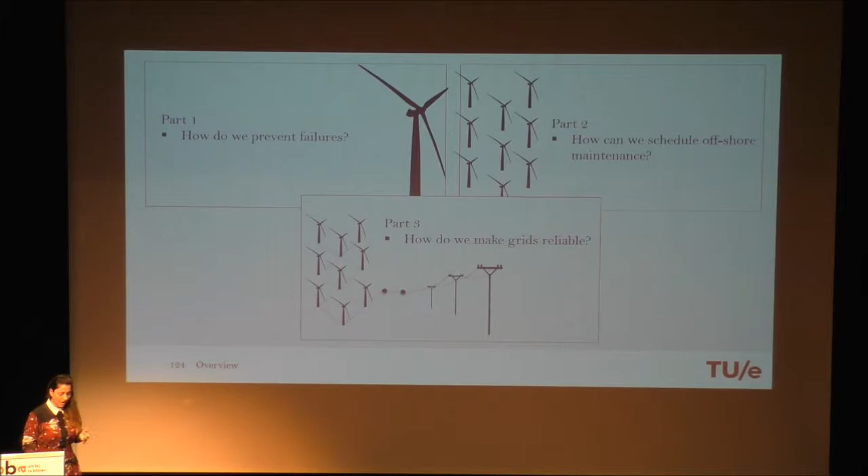In the first part, I'm going to address how we prevent failures when we're just looking in isolation at one single wind turbine. Then I'm going to extend this question in part 2 into how we can schedule offshore maintenance. So we have an entire wind park, and in that wind park we want to prevent failures from occurring. And you will see that the nature maintains some characteristics, but it also has some endogenous differences. And then in part 3 I'm going to move towards grids, and how we can make grids much more reliable. So starting with the first part on how we prevent failures, I'm going to start with the data, because everything in this setting starts with the data.

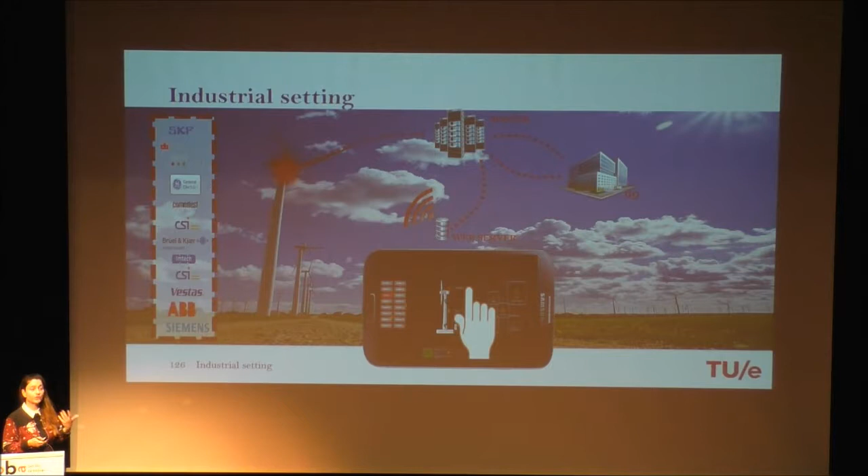So every single wind turbine is purchased with several sensors already, and many service providers can actually give real-time access to the status of a wind turbine. And typically that comes with 3 color characterizations. Green, everything is perfect, clear skies. Orange, I see some warning behaviors. And then there is red, things are starting to fail. And what I'm interested in, and this is part of the research that I'm involved in, is actually determining which of the 3 stages we are in. And for that purpose, what we do is we look at the data.

One of the most important characteristics of the data that I'm going to demonstrate the algorithm around is based on vibration data. Vibration data work exactly in the same way as in seismology. The only thing that is measured is displacement over time. So what you see here in the 4 blocks is vibration readings for the gearbox, vibration readings for the generator at one end of the drive, at the other end of the drive, again the generator, and here you see vibrations on the shaft.

Typically when installing such a sensor that collects the data, it comes with an ISO standard. And the ISO standard says that upon calibration, if your vibration readings are between 0 and 1.06, and the 1.06 is exactly this orange line here of the warning, then things are good. If you're in the region 1.06 to 2.12, then things are getting out of control. And if you're in the region above the 2.12, things have gone completely out of control, and therefore you need to stop the wind turbine.

And the first question that I had when I looked at that data is, and how much was the wind at that stage? Because I could imagine that the stronger the wind, the more increased the vibrations. So how do we take that into account? And the answer that I got is that we don't take that into account. All of this has been created in a laboratory in more or less a vacuum. But wind turbines, in practice, they're not in vacuum. They're out in the world, they are exposed to elements, and therefore this needs to be accounted.

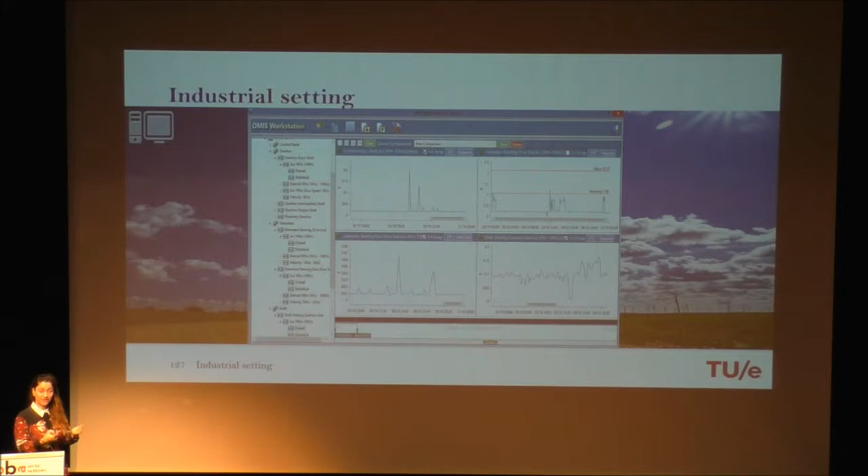Because preventive maintenance is nothing else than the terminology, the scientific in some sense terminology, or the everyday lingo for avoiding failures. It has a different meaning if I'm talking about my car, if I'm talking about my bike, and if I'm talking about a nuclear factory. So depending on the severity of the outcome, I would like to be, let's say, in some situations more modest, in some other situations less modest.

So the first thing that we did was we looked at all the available data. And for a wind turbine, all the available data comes in the form of vibration readings for all the components, and you see here already all the components being sketched. Also temperatures for all the components, and in addition to that, information about the environment. For example, what was the ambient temperature, what was the wind direction, what was the wind speed, what was the humidity at that time. In addition to that, was the wind turbine operating or not? Was it connected to the grid? Was it not connected to the grid? Was it being maintained? What sort of problems did it have?

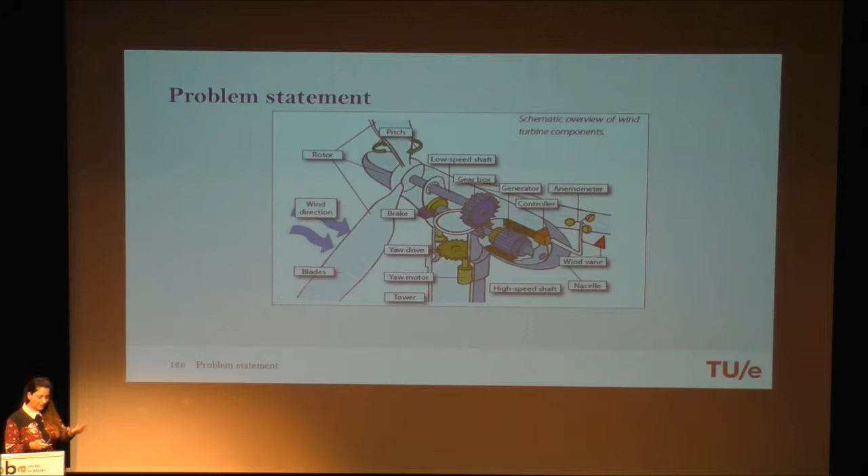So based on all that data, the objective that we had was to determine what would be a good strategy for preventive maintenance. And for that, we wanted to be able to do monitoring, we wanted to be able to do prognostics and to do forecast, and we wanted to be able to do diagnostics, identify back what is the component which is suffering, because that is also an important factor.

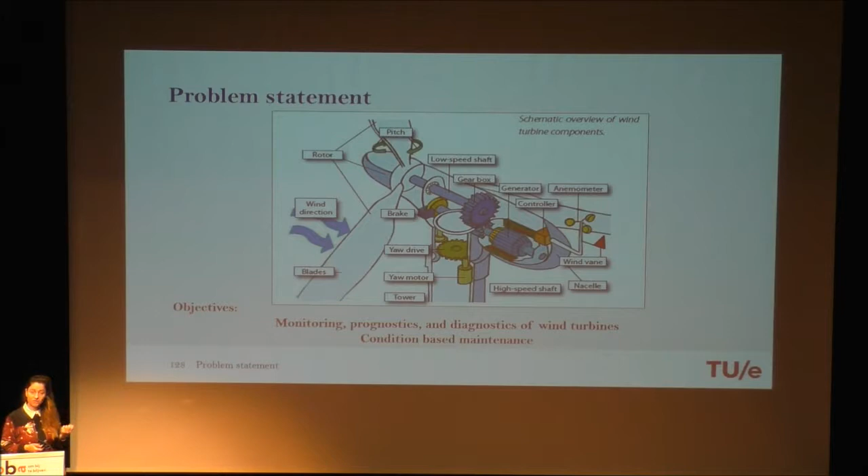And based on all this information, suggest condition-based maintenance, which means nothing else than the following. If the condition of the equipment has deteriorated, this is the point that you want to do maintenance. If the condition of the equipment is still perfect, then no one would like to do maintenance. So taking that into account, the objective that we had was to identify the condition of the component.

So the first thing that we did was we looked at the data of the generator. This is a generator which, what happened was, just before December 2014, it exploded. So the picture that I used in the beginning was not the picture for that particular wind turbine, but just to give you a level of understanding of what happened. While no one had predicted the explosion of the generator, they had already predicted that things were going completely out of control, and the problem lay in the generator.

In practice, already here in November 2013, there was the first big disassembly of the generator. They disassembled the generator, they investigated what was happening, they were not able to figure out what was the problem. Then this happened again here in March 2014. And they let it run until December 2014. In some situations also the Wi-Fi was not working or some sensor was not connected, therefore we don't have data. And we also know that this is the ISO standard, which is set at 1.06, saying that if I exceed this value, then things are going out of control.

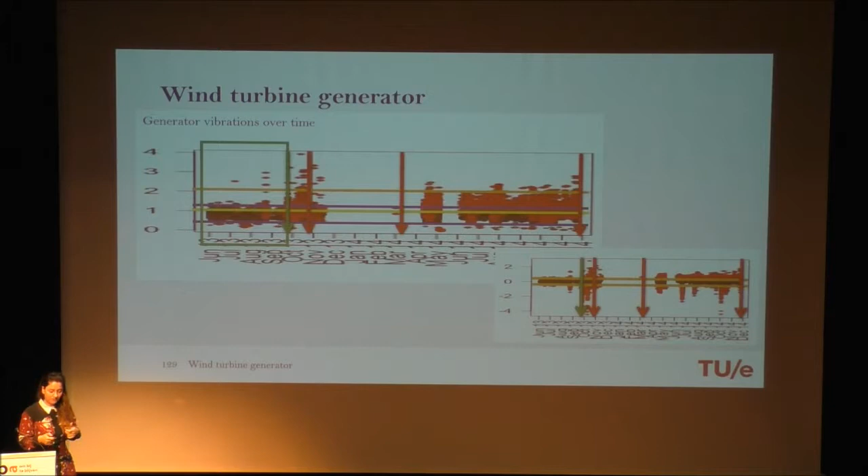Talking with the field service engineer that actually did the disassembly of the first generator here, just before November 2013, his perception on the matter was that, yes, I could see, I could feel it, but there was nothing to substantiate. So the data was indeed substantiating that. So one thing that we did was we developed different algorithmic approaches that actually predict when things are going to go out of control. So that was about the monitoring, and it was about the diagnostic aspect.

Going then to the preventive maintenance, because nothing in the previous picture was accounting for a very important factor, the cost. So depending on the component, there is a different cost. Many operators of equipment, in their maintenance strategy, when they're not sure which component has gone bad, just replace the cheapest one, because that comes with very low cost. So in practice, every maintenance, every failure aspect comes with a cost. So this is a very simplistic schematic ranking of the cost.

If we just go and replace equipment without knowing the condition of the equipment, this is the most costly. If we just let the equipment fail and then replace it after the failure, this is catastrophic breakdown, and this is the second most costly. The third is if I get a phone call from the equipment operator indicating there's something wrong here. Could you come and check it? Could you come and preventively replace it? That comes already with a lesser cost. But what can significantly reduce the cost of operation is preventive maintenance. And the most simplistic framework of preventive maintenance is planned maintenance.

And for the wind turbine setting, the notion of planned maintenance is a maintenance that takes place every 6 months. So every 6 months, the field service engineer takes a huge handbook which describes every component of the wind turbine and every step of the process that the field service engineer needs to perform. He goes up on the wind turbine and then checks component per component and preventively replaces everything that he feels is going out of control.

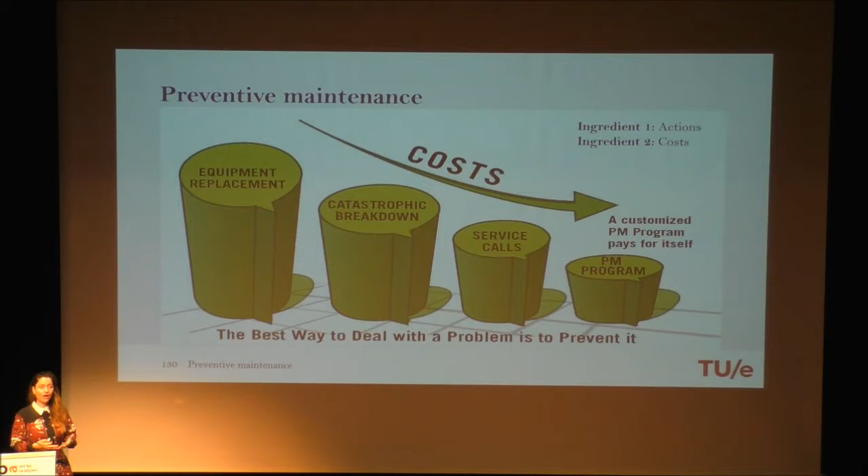And that already can bring down the costs almost to half, and of course it depends on the context of the application, than just letting it break down. So in this context of the wind turbines, we wanted to understand what would be a good rule of thumb for such a wind turbine. So for every component that consists of materials which are metallic, for example, there is the notion of stress, there is a notion of load.

So in the beginning of its lifetime, the stress that the machinery can tolerate is quite high. As time progresses, the stress that the machinery, the equipment can tolerate goes down. And when it reaches its stress limit, actually it breaks. So if I go back to my generator exploding, the whole process started from the blades. It was a small crack in the blades that propagated. So it starts typically with a material, and the material degrades over time.

So then the question is, if I, from the data, can retrieve that, then depending on the cost structure that I have and depending on the action, and the third part is depending on this degradation mechanism, can I suggest a preventive maintenance strategy? And the answer is yes.

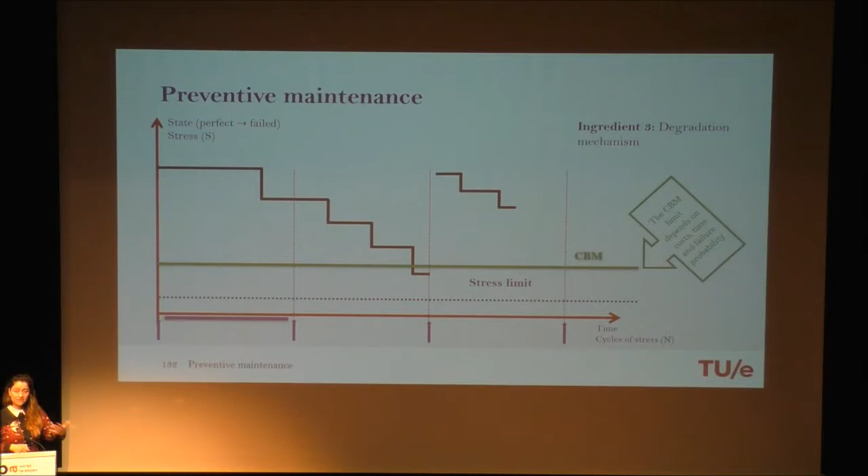Already by looking at the data, we have an understanding, and we can say to the field service engineer that the condition we see here is going to be below the level that we put our tolerance at, therefore you need to preventively replace it. Once such a preventive replacement happens, then after some delay because it took some time for it to be repaired or replaced, the equipment starts again with a perfect condition and it degrades over time. And this is repeated. So this is the most simplistic notion of preventive planned maintenance that a person can do on a single wind turbine.

So now the question arises, how can we extend that to a setting of a farm? So we have a wind park, and in particular we're interested in an offshore wind park. And the reason behind offshore wind parks is that they are difficult to access. For an offshore park, someone needs to hire a boat, someone needs to hire the expert engineer. The conditions weather-wise need to be perfect, and only then things can be arranged.

So we cannot say that today I know based on my data and the monitoring that I have in place that the situation is going out of control, therefore let's organize the boat, let's organize the engineer, let's go to the sea and then let's repair things. So things need to be planned, and need to be planned months in advance. So the question now is, do we treat an entire offshore wind farm the same way that we would treat one single wind turbine?

And the answer is sort of. So let me start with the particular schematics of this wind farm that I'm going to talk about. This is a wind farm offshore, I think it's outside of Zeeland, and it consists of 60 wind turbines. And what we wanted to see is, are they all similar? Are they all identical? We know that they were purchased exactly the same year, they're exactly of the same type.

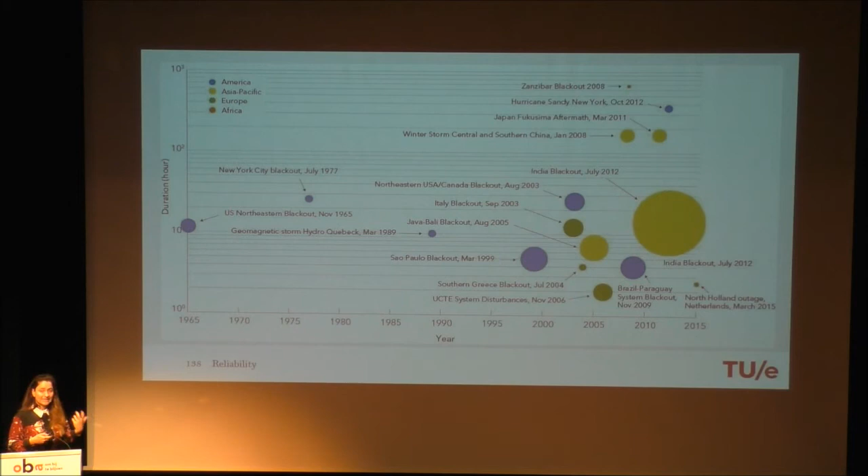And the reason behind it is that energy networks are actually aging, and they are aging disproportionately to how technology grows. And the other thing is that sustainable energies are in some sense straining out the potential of such networks. And just to give you some very recent hints of what happened, on April 30 of 2018, 6,000 passengers had to remain at the Amsterdam airport and depart with their flights the next day.

And then on February 19 of 2018, there were power cuts that hit more than 75,000 homes in the generic northern Netherlands area. So in general, what we notice is that there is an increasing pattern in such power outages. And then the question is, how can we address this in a mathematical context?

Without going into any details, the generic structure of such an optimization problem would be that I want to reduce the cost, I want to reduce unavailability because I want to have the power grid available at all instances of the day, and of course I want to have the maximum reliability possible, subject to balance constraints, subject to the power flow equations with a level of randomness accounting for sustainable energies, and also satisfying failure limits.

If we solve that, then we discover that the policy that the Netherlands has for the N-1 rule, which means that if one line in my grid fails, we can deal with it, but if 2 lines in the grid fail, then the entire network connected to that fails, is already indicating that this rule can be easily put in jeopardy.